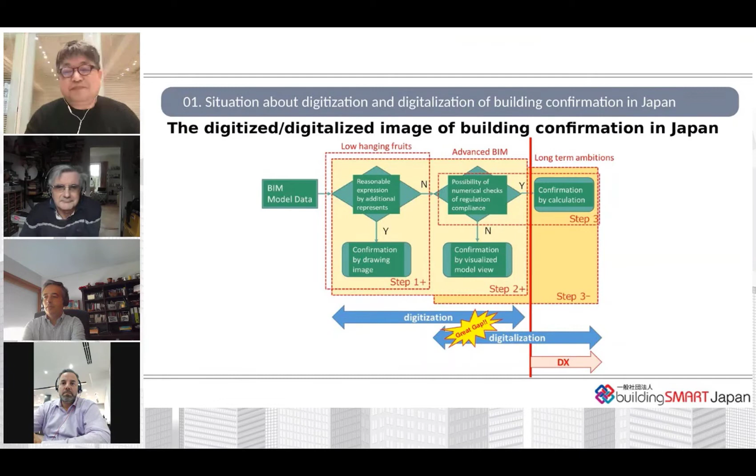The major issues are shown in this slide. The technical aspects are as follows. Can model viewing be a substitute for paper-based building confirmation processes? Especially, is it possible to express the designer's intention on building confirmation without excess or deficiency in the model view? Is it possible to archive the BIM confirmation data for the long term, as contrasted with paper document archives? For example, long-term authenticity and long-term readability.

The institutional aspects are as follows. Is it possible to prepare machine-readable legal documents? Who will bear the increased cost? How to ensure the BIM literacy required for building confirmation?

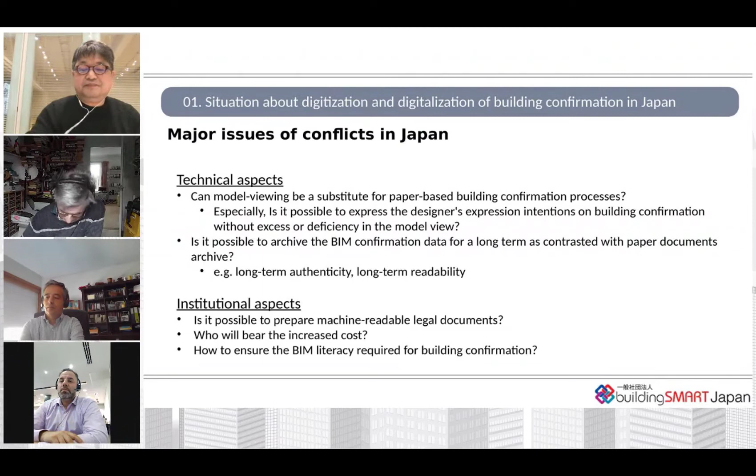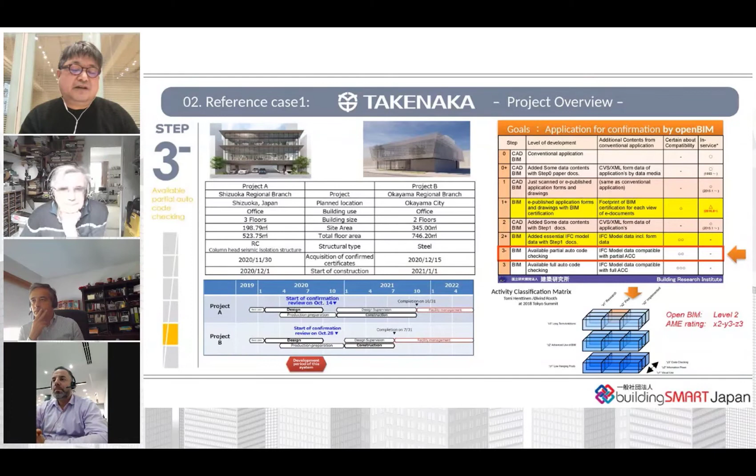Next, I'd like to introduce the reference cases. First of all, it's a case of Takenaka Corporation. Takenaka Corporation worked on IFC under the policy of open BIM. In both cases, the type of building is office, and the actual project was done between 2020 and 2021. The effort in this project is rated step 3- on the BRI development steps, or Muto scale. And the activity classification matrix, which is an indicator of BSI, evaluates the project as X2, Y3, Z3, and the open BIM level as level 2.

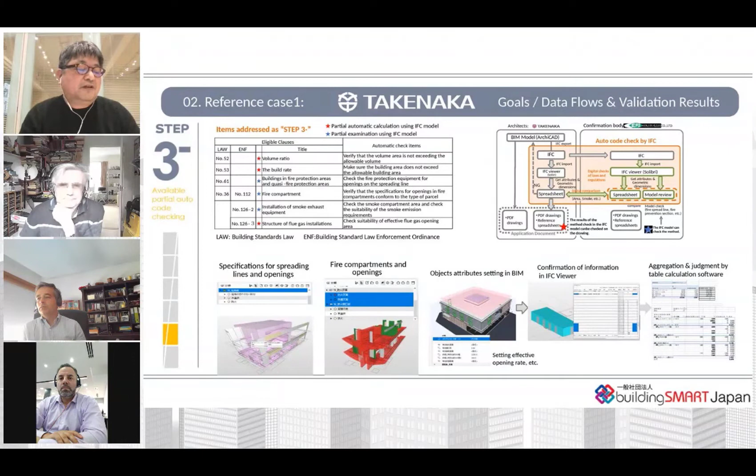These are results of this trial verification. In the upper left is a list of inspection items using IFC for the legal compliance check. The upper right shows the confirmation flow, and the lower figure is an image of open BIM confirmation. In this trial, the open BIM confirmation was conducted in addition to the conventional confirmation based on paper documents, so time-consuming work occurred. However, it became clear that if the open BIM confirmation could be fully conducted, the work could be reduced by approximately 30%.

Here is a summary of the Takenaka Corporation's trial. In order to develop this achievement in the future, it is necessary to understand step 3-, the merit of using IFC for building confirmation, and to treat IFC data itself as authentic data equivalent to conventional paper documents. On the other hand, it is necessary to build a consensus in the architectural community on whether IFC data can be used to meet the long-term preservation requirement of 15 years for application documents in Japan, and how to do that.

The next is the case of Shimizu Corporation. Shimizu Corporation's project was hospital construction, an actual project conducted between 2020 and 2021. Shimizu Corporation had considered the IFC approach in the past, but there were still many issues to be addressed at that time, so the decision was made to use the BIM authoring software environment for this trial with a view to using IFC. In this trial, the BIM authoring software and VPL were used to determine legal compliance, and BRI development step, or Muto scale, 3- was achieved. The project was rated X2, Y3 and Z3 on the activity classification matrix, an indicator of BSI, and level 1 on the open BIM level.

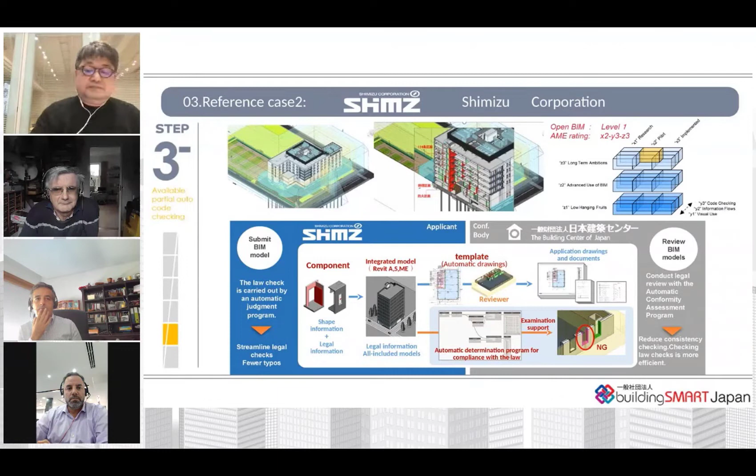This is a VPL process in BIM building confirmation. In this method, the attributes for the building confirmation are taken from the BIM model, imported into VPL to be checked by programming. The reason for using VPL here is the emphasis on visualization and

repeatability. The process of legal compliance cannot be trusted unless it is understood not only by designers who created it, but also by the reviewers who use it. It is also important to ensure that the same process used by the designers can be replicated by the reviewer.

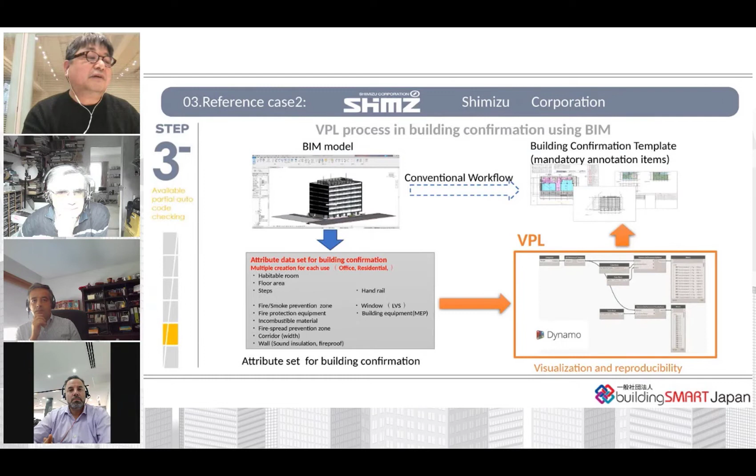For this reason, in this project, Shimizu Corporation extracted the items that could be compliant with the law using BIM and described the confirmation process in VPL, which was used as confirmation support. In this method, the components required for legal compliance and their decisions are extracted and combined, and VPL is used to determine the result as shown in the upper figure.

The lower three figures are examples of its utilization. Of particular interest is the consideration of the lightning rod on the far right. This is a visual representation of whether or not the building is within the protection zone of the lightning rod. This is a matter that would be difficult to represent and judge with ordinary 2D drawings, but by using BIM data, it is highly visible and easy to judge.

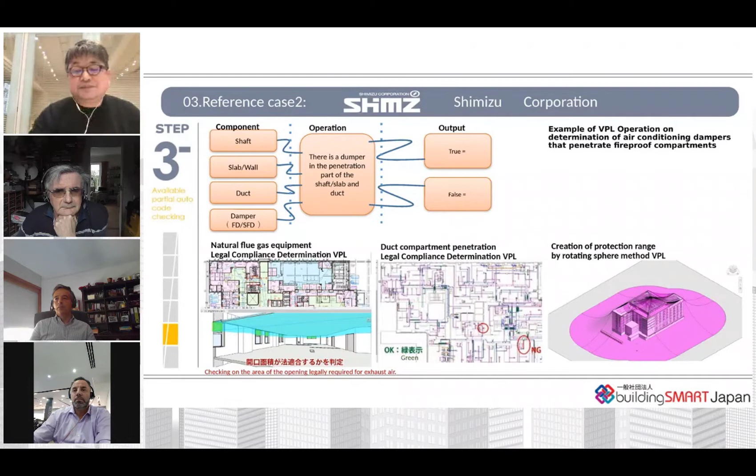Finally, I'd like to talk about the effort of the Digital Confirmation Application Working Group of BSJ. At the Autumn Virtual Summit in 2020, Mr. Kensuke Yasui, as a representative of our working group, announced that we are considering defining regulatory information that should be observed by regulations and exporting it in IFC.

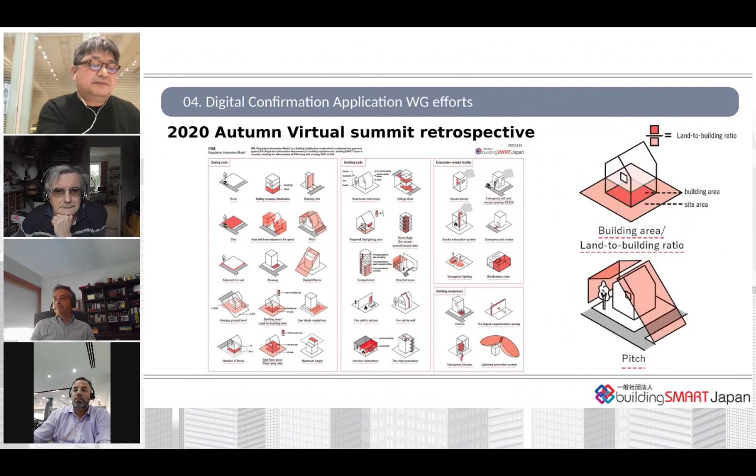This is an illustration of regulatory information that we would like to define in IFC that we introduced at that time. Discussion is ongoing, and here are some of the things we are discussing. We believe that defining RIM in IFC, which represents a model of the regulatory information of a planned building, will greatly contribute to the

internationalization of building projects. Therefore, in order to define the RIM, the working group for digital confirmation application defined two types of regulatory information. The first, regulation requirement model, RRM, which models the regulations themselves. And the second, regulation approval model, RAM, which models what has been planned and approved.

In Japan, the type and the size limit of buildings on site are regulated according to the use classification of the site. This size limit is based on the area of the site. Therefore, we are trying to extract the necessary information on area of site or floor area of building, etc., which is the basis on whether a building is buildable or not. The decision is largely based on the building to land ratio and the floor area ratio.

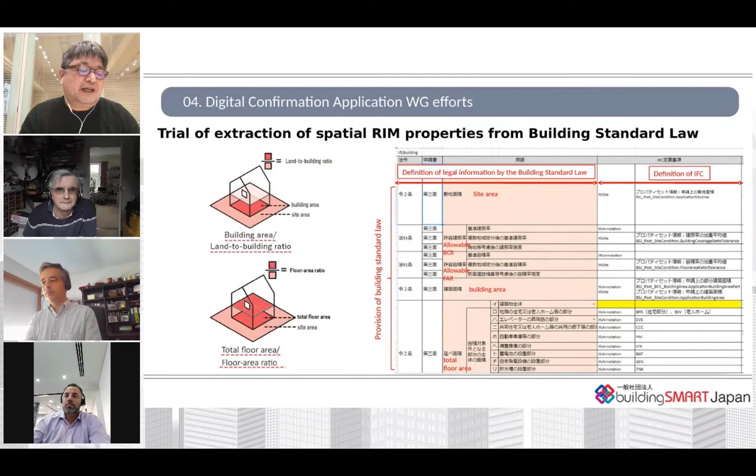But in the process of arriving at this decision, there are particular uses that are excluded from the total area. Our working group is currently investigating how to give the attributes necessary for this distinction. Our working group is examining the application for confirmation using IFC, referring to reference cases introduced earlier.

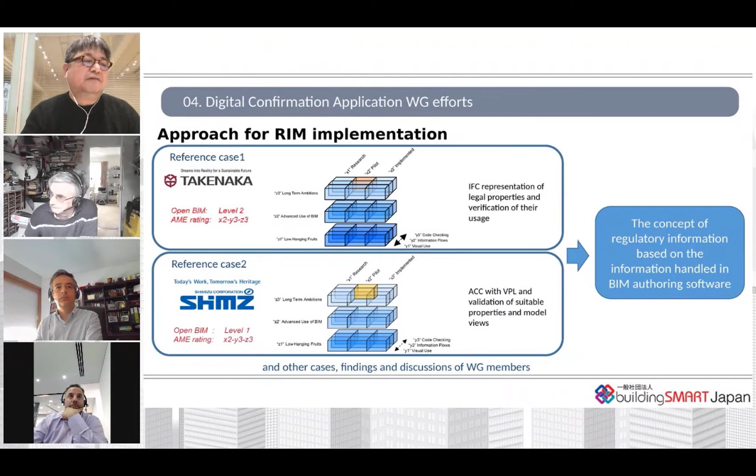This figure shows an image of an approach to implementing the regulatory information model. Our working group is trying to define the concept of regulatory information based on the information that can be handled in BIM authoring software, through the case of Takenaka Corporation, which is an example of legal property expression and their usage, the case of Shimizu Corporation, which is an example of a definition of properties and model views used for automatic code check using VPL, and other examples and working group members' findings and discussions.

From now, based on the cases and the studies I showed earlier, we are planning to create an IDM to express the necessary information organized by IFC for the area, and to define an MVD for building confirmation by IFC. In order to confirm whether the data can be extracted reliably based on the MVD, BSJ will conduct the IFC certification on RIM. After that, we believe that it will be possible to implement the systems. If this can be established for the area first, we plan to continue to add more items by developing MVDs.

So far, I presented that at the last summit. Then I'd like to talk about the progress of the study of spatial matters. As I mentioned at the beginning, the flow is digitalization and digital transformation in this presentation. The working group has been working on three phases along the flow of digitalization. Sorry. The definition is shown in the figure below.

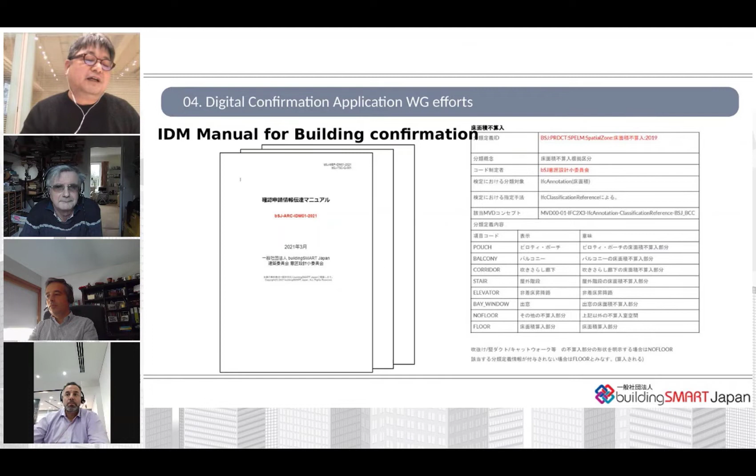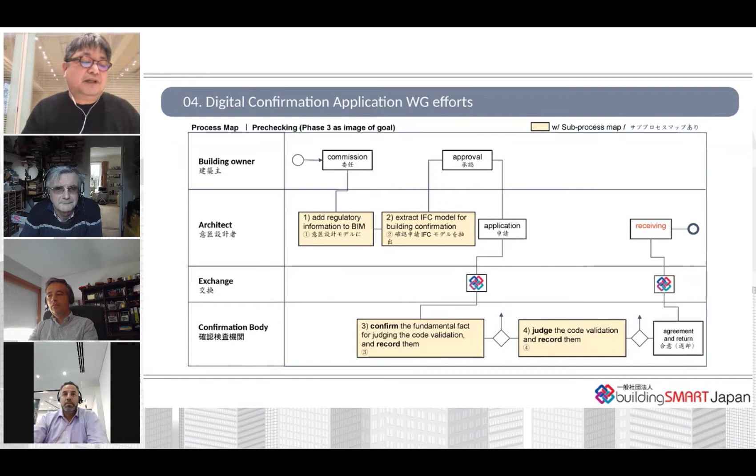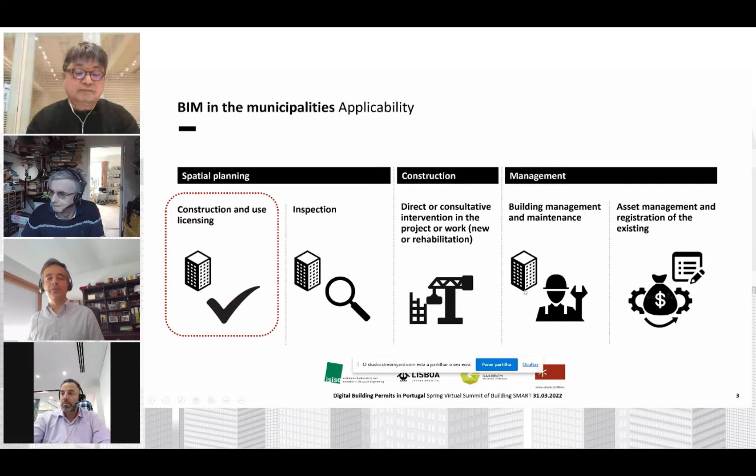So with this, the problem that has been identified is clear. We know that the inefficiency of the building permitting situation is a global problem. It's not only ours in Portugal, but we are definitely one of the countries with a lot of problems. The problem is time and money, basically. According to our Portuguese Investors Association, the investors for real estate, we have been in contact with them, they say that time is representing a very big damage to their capacity to promote investments. There's a very big degree of uncertainty, and so this damages investment.

It damages the economy, and then at the same time, it's not the municipalities that are the big bad wolf. The municipalities are actually struggling. They have too many things to analyze. They deal with the fact that they are public institutions. They cannot just open a box of money and make things happen immediately. So processes are slow. The number of people available is not many, and by not being many, they do the best they can, and still processes are delayed. So what we want, of course, is making the processes easier for these particular people, so they can actually contribute to a better streamlining.

And of course, there's also something extremely important, and in our contacts with municipalities this was clear: many times we are incorrectly charging taxes to the people that should be paying the taxes, because, for example, there was an area that was misdeclared. And so if this happens, then everyone is being damaged, provided that someone is not paying what they should be. So I think there's a very big problem that needs to be addressed.

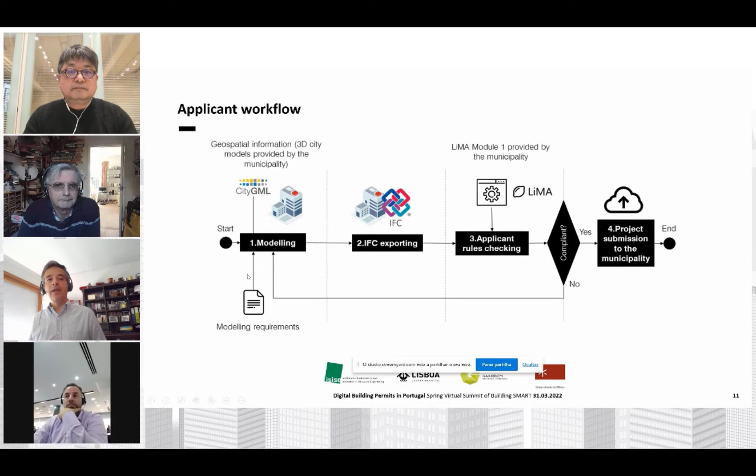So the workflow that we are considering is this one. From the point of view of the applicant, and next I will speak on the point of view of the municipality. So the applicant will receive the CityGML files from the town where he can integrate the BIM model in, and he will receive modeling requirements so that the BIM model is created according to some rules. Of course, by default, everything is made in IFC, so we are not using anything proprietary. It doesn't exist for us, literally.

And then there will be the rules checking that the applicant can do by uploading the project to the platform. So this is not a verification by the municipality, it's just using the platform to get an instant insight into the problems he may run into. And then if it's compliant, okay, it's ready to be submitted. If it's not compliant, then it just goes back and the person handling the modeling can just upgrade or change the project so that it becomes compliant.

Sometimes, if it's not compliant, not a problem, you may submit it anyway, but you will provide some evidence of the reason why you think, even though it's not compliant, the project should be approved. Maybe sometimes it's just a 0.1 millimeter difference, and you say, this is just a numerical thing, let's not delve into that.

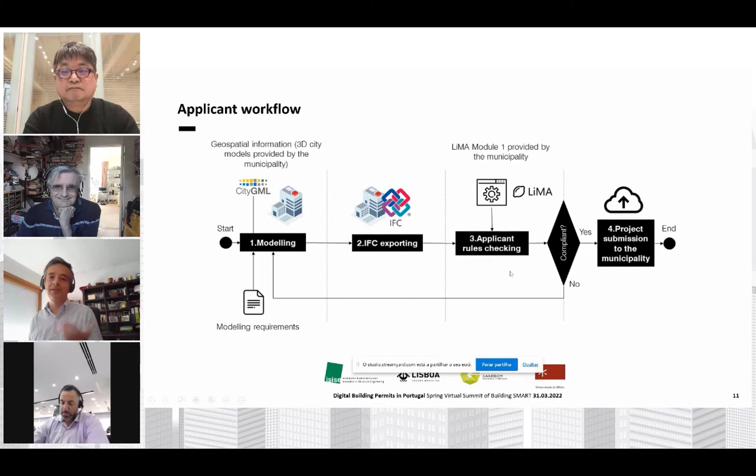Of course, in the workflow of the applicant, I didn't show this, but the applicant will receive later on BCF files, which we are still studying how to authenticate digitally so that they have the force of law, if you understand what I mean. They are legally binding. And so at the end, this would be a process that would be relatively simple from the practical point of view.

And we are dialoguing with our agencies for the platforms for documentation management to make this actually something that embeds into the current procedures of municipalities. So we are just adding an IFC to the process and the BCF. So this is a screenshot of what we are already doing. So we are programming this.

Of course, it's a web platform. In this case, we believe in the software being hosted in the municipality, and then it's coded in PHP and JavaScript together with HTML, of course, and then we are using some open platforms like the xeokit to do our graphical interface, but it's open, so nobody has to pay to use this if it's non-commercial.

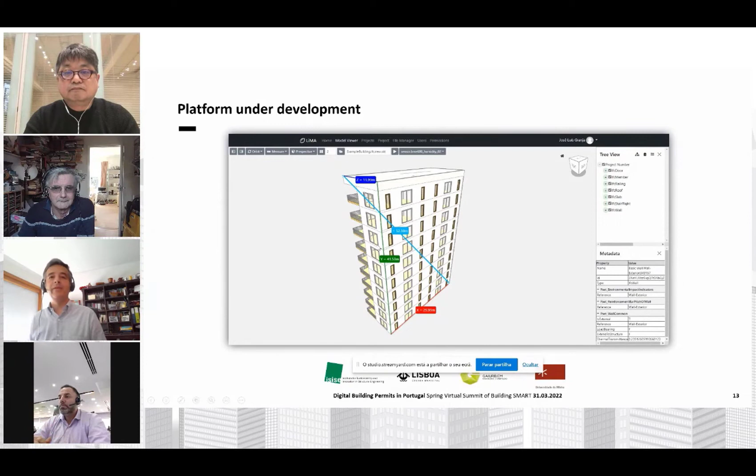And then in the end, this becomes available to whoever wants to test it in the future. We are opening this also outside. So the platform then relies on some Python code behind it to make the verifications using IFC OpenShell, by the way. So this is just one screenshot.

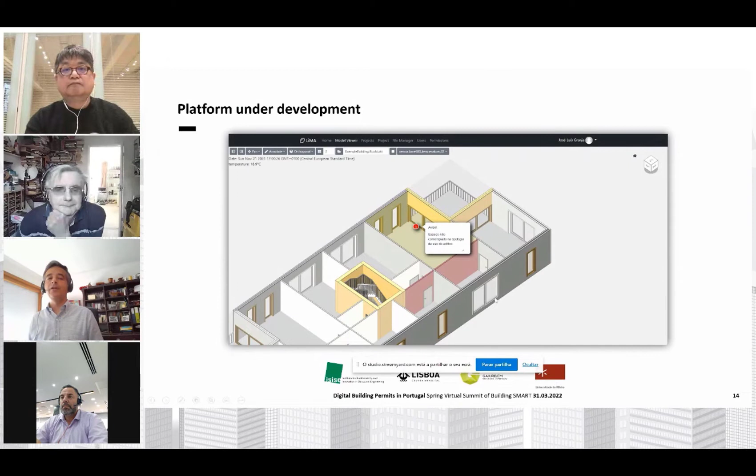And of course, the platform then makes variations according to the verification of what you are seeing and why, and then how you can act on that to create the BCFs. So of course, sometimes you will have plan views, other times you will have three-dimensional views. And one of the most recent things we did, even though it's not that appealing what I'm showing on screen,

is the preparation of some reports that are mandatory in Portugal, which is some table with areas and other aspects of the project, and some information that is necessary for our Institute of Statistics. And this is being done already automatically, even though we didn't do the interface yet, and we are working on the interface, so that apart from already doing some verifications, we are still starting.

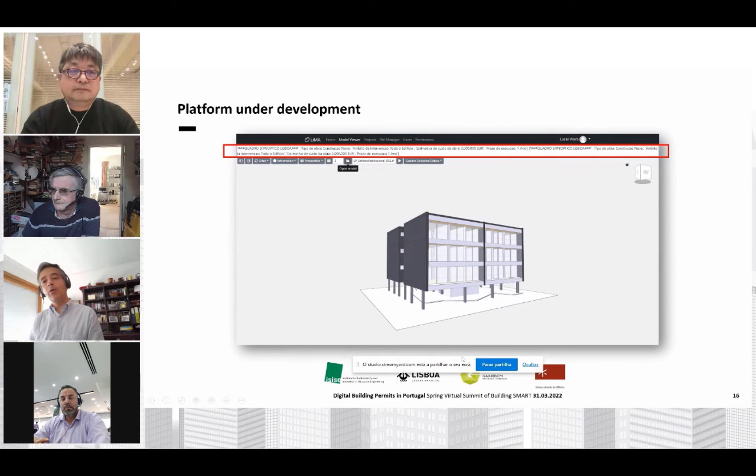We are already also doing the preparation of some formally necessary documentation that would be created from the BIM model. And of course, at the same time, we are working on interface ways for the municipalities to operate here. And the interesting thing, and I'm almost finishing, is the fact that by working together with the municipalities to develop this, we know that this is being validated by those who finally will use it.

So there are many advantages, and I think I mentioned most of them. So we are faster, you will manage your expectations better, taxes will be better collected, and also to motivate people, merit badges or things like that, to make sure that this will be advantages also. Not only do you get the advantage from using BIM, but also you will be recognized.

And the project that I mentioned, the CHEK project, is starting, and we will do also many things that are complementary to what I stated, and try to make an umbrella so that within the European Union, or even throughout the world, but first thinking about Europe, we can get something that will assist the frameworks throughout the entire continent. And that's it. Sorry, I was just rushing to keep my 15 minutes.

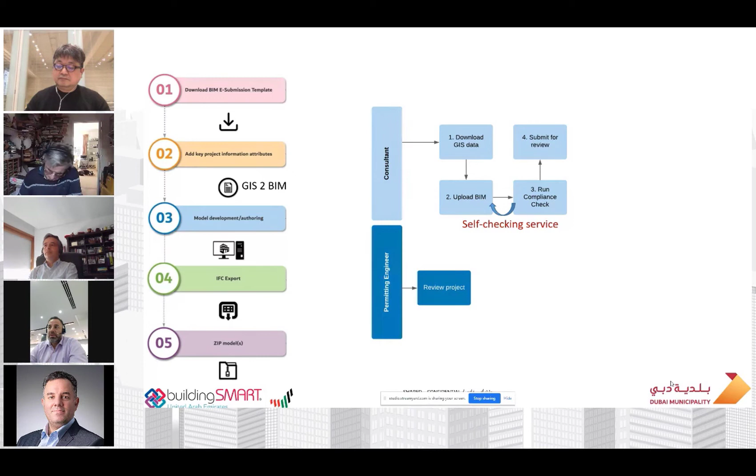And we provide for most software, like Revit or others, shared parameters, mapping files, options for the exporter to make this process straightforward. And also we guide him through the process of geolocating the model. To reduce the upload time, he should zip the files. He can include one or more discipline models in one zip file and upload it to the platform. So this is in general the process.

If we think about what the building permit engineer does from the point when the consultant released the model for review, as we said, he will review the model using the 3D viewer. He will run the compliance check if it was not done by the consultant himself. He generates the compliance report, notifies the consultant which rules should be fixed. He can give him some tolerance or allow some warnings or not very important rules to be ignored. And he asks the consultant for revision.

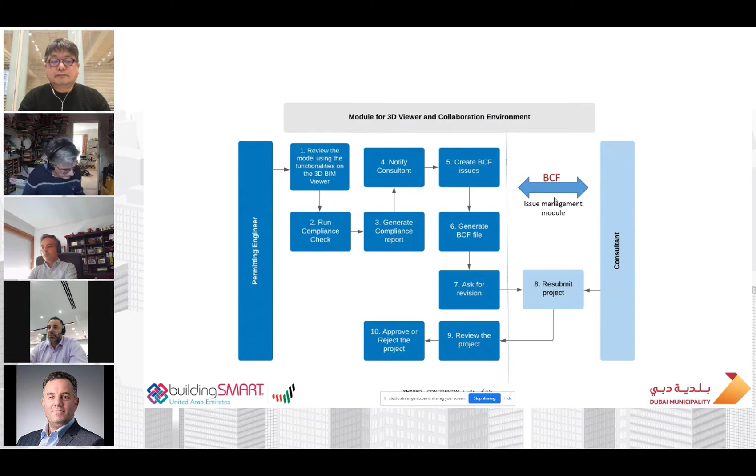The revision should be done by the consultant, and they can, during this time, also collaborate with this issue management module using BIM collaboration format until the model is correct, the information in the building card is complete, and the model is geolocated. The model is compatible with our BIM to GIS converter, so we can, after the permitting of that project, take it from the BIM world to the GIS world and convert it to the GIS compatible data structure. And at the end, the building permit engineer should approve or, for some reason, reject the project.

So this is in general the simplified process. I don't know how many minutes I have, just to figure out if I want to do a live demo, what I should focus on. Well, yes, please go ahead. So this is exciting.

So the platform is available online. If you go to bim.geodubai.ae, this is the URL of the platform. You will get access to many documents which will help you to understand how BIM is implemented, or our approach in Dubai. So just to show you, if you go to the platform, it's not necessary to log in, but if you go to the download, you will see that the BIM standard documents are available

for download. The Dubai building code, which is recently released, is now unifying and harmonizing all other previous codes and solving the problem of the jungle of codes which we had previously. So now in Dubai we have a unified, one single building code, like 800 pages with cross-referencing for hundreds of other standards. You know this problem for sure.

And we have other documents like the BIM roadmap, the BIM template for Revit and other software, and also a step-by-step BIM e-submission guideline document. Actually, testing, evaluating and accessing the platform is limited to registered consultants and contractors in Dubai. But at this phase, we are open for any collaboration with people who would like to give us feedback or to collaborate with us. So just contact me, and I will enable you to have access to the platform.

Of course, I will not have time to explain step by step, because then I have to log in and log out in different user roles to show the whole platform. But I will just try to show you how the platform looks and how it works. So now I'm logging in as a super admin, so I can actually do anything. But we will assume here that the consultant has already created a project, selected a multi-story project, and put the parcel ID for that project.

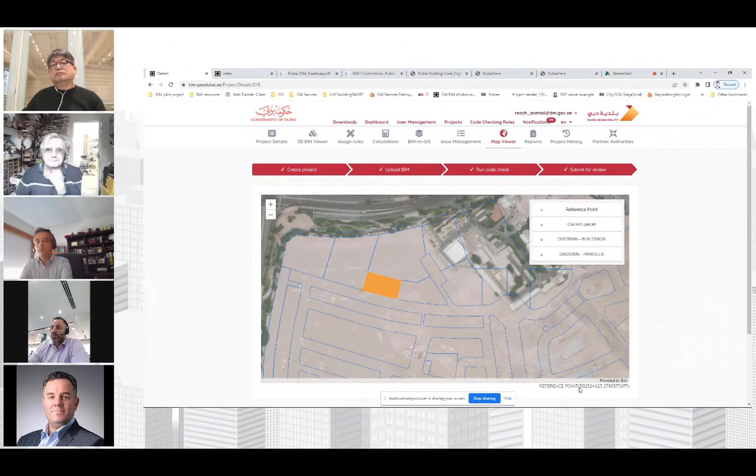So we can see out of the box now the location of the parcel ID. We can see surrounding buildings; maybe the layer color is not very good. And he can even use the reference point, this point here, for referencing the geo model if he doesn't want to use the GIS to BIM. If he decided from the beginning to download GIS to BIM, we provide him with a data set of information, and here I'm showing the zip file content.

It includes some IFC files showing the buildings, the border of the whole community, the parcels in that area, and some other GIS layers, electrical, water, etc. And we provide as well different layers in DXF format. And all this information, either the IFC model or DXF, is geo-referenced.

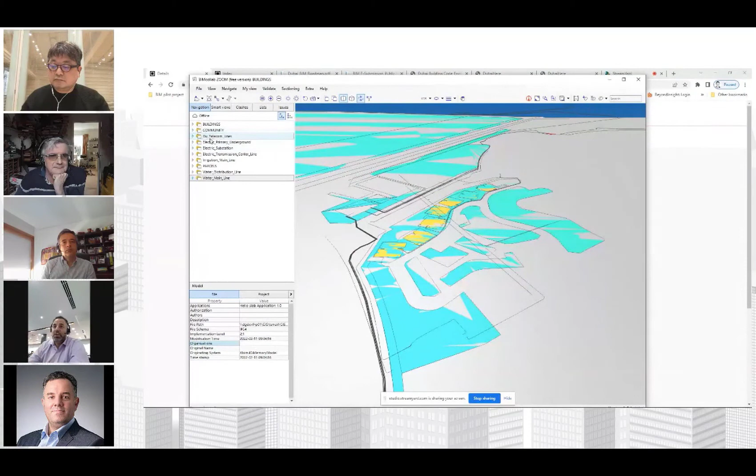So actually, if we open this model here in BIMcollab Zoom and add all these models, we can see here that we start. As I said, we need to improve this a little bit, to extrude the buildings with the real height, etc. But at least we have the GIS context information in a format which is known to engineers. It is IFC and DXF. It's not GIS at the moment.

So after that, we assume that he downloaded also the BIM template. As we said, we have BIM templates for 3 software at the moment. And if we take, for example, Revit, we will see that he has a guideline, the template itself, shared parameters, IFC parameter mapping, and the property sets, to be sure that the information included in the IFC file is the information we are asking for.

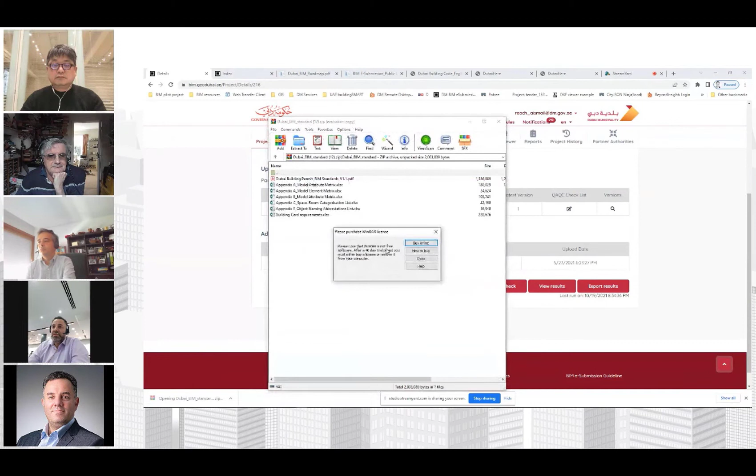If we look at the BIM standard itself, maybe there's no time to explain it in detail now, but at least I will show how the information requirement is defined at the moment. So we have the BIM standard, the document itself. It's not a very huge standard at the moment because we focus only on the building permit. We have naming conventions for everything. We have, as I said, the terminology alignment with ISO, and then we have LOD requirements.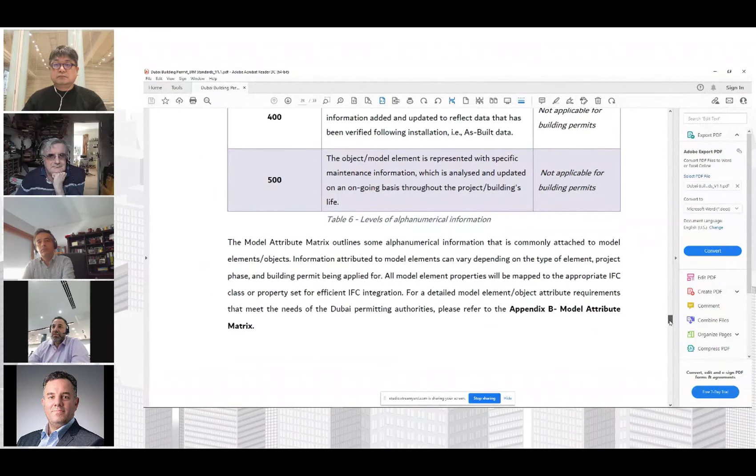And what is maybe most interesting for you to see is the classification system which we assume will be used. Now we are using Uniclass, and we started implementing OmniClass as well. So we would like different classification systems to be allowed inside one model.

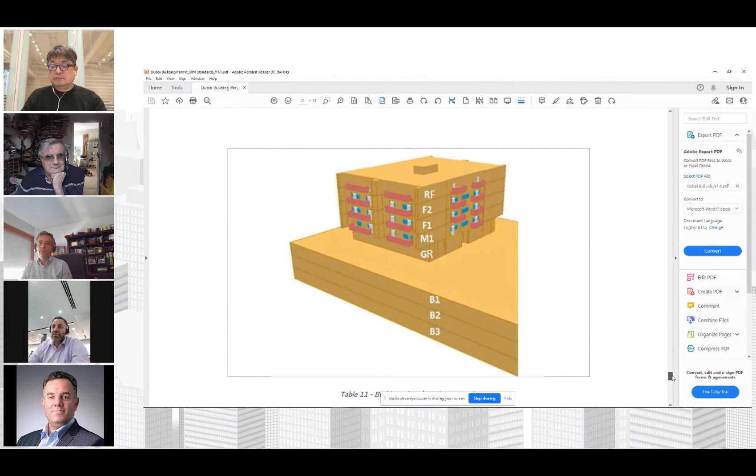And we have in the BIM standard some guidelines about the naming convention for buildings, for floors, even for elements inside the model. And if we look at our requirement of information, at the moment we are still using an Excel file. We plan maybe to put it online or on the cloud, or use a better system.

But as you can assume, for every kind or category of object, these are most of the objects which are supported at the moment, you will get a list of the attributes which should be included, the minimum information which should be assigned to different elements like beams, columns, coverings, ducting, doors, fans, etc. And for each of these rules, we are putting some further information, like where this information comes from. If this information is coming from the buildingSMART predefined standard, it will be recognized by Pset underscore and the standard name of that property set.

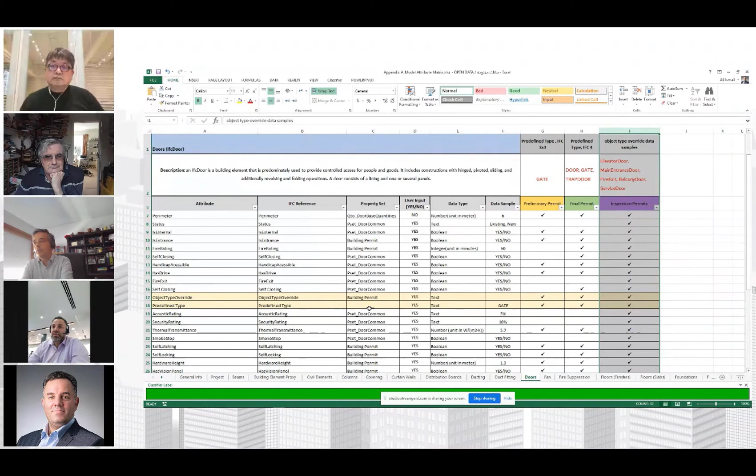In some cases, we are adding some additional attributes because they do not exist yet in the BIM standard, or maybe they deal with some locality or special cases here in the Emirates or in Dubai. And even more, we show where and why this attribute is important and where it should be used. This information is reflected back in the shared parameter files, or what is similar in other software. In this case, the consultant has a clear idea which information should be included and why. And furthermore, if we go back to the platform, because I assume you are maybe more interested to see the platform in action.

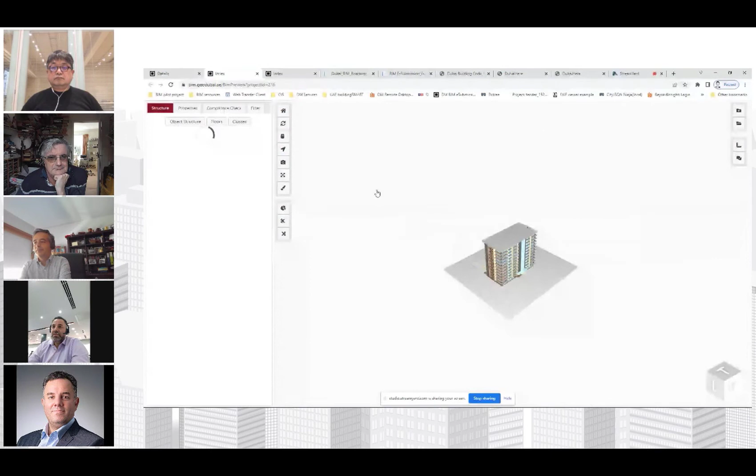So here he uploaded an architect model. Of course, he can upload other models. He can upload different versions. We can compare different versions, etc. We can merge all models together. So this is something I assume is not that complete. For this building, until it uploads here, I will show the aspects for that.

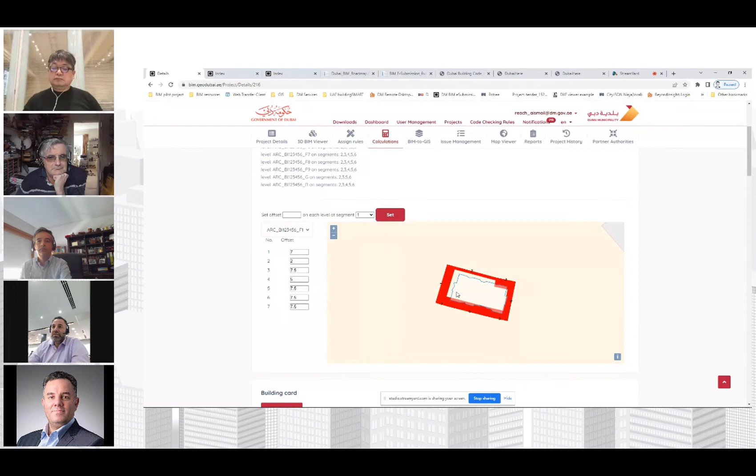We are not only focusing on the automated code checking. We are also focusing on the integration with GIS. So here we see, for example, it's now possible to do a visual check for the setback rules. All rules from the Dubai code, like according to some criteria, what should be the minimum setbacks from all areas, like if you have a road or building, or according to the neighborhood buildings. So a lot of rules can be visually checked here. And we see that all of this information is coming from the BIM model itself.

So here we can get a list of all floors, the total floor area, facilities, circulations, 1 bedroom, 2 bedroom, 3 bedroom. All this information previously had been provided manually by the consultant. It was a tedious and error-prone process. And there are also some very complex calculations here, which are maybe not that easy.

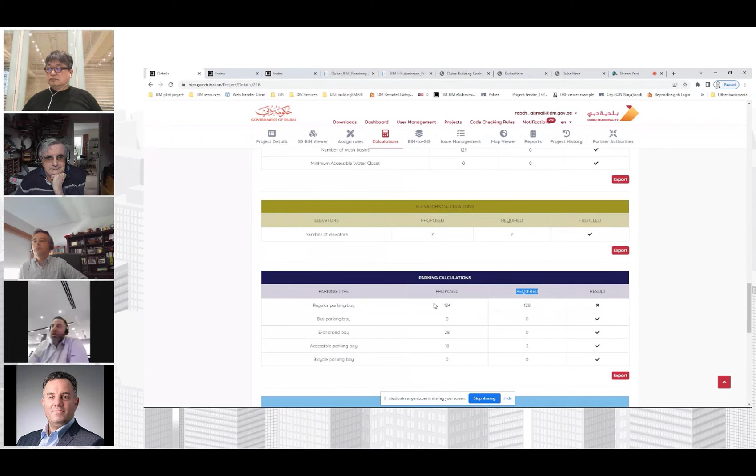But when we think about rules for parking, to decide how many parking places you need for a hotel or a mall or a school, whatever, there are some very complex rules for how you calculate them. So here we are doing some complex calculations in order to decide the number of proposed and the number of required parking, or waste like garbage bins, or other things. In the future, we will add more rules. We will add more calculations to improve the extraction of information from the BIM model.

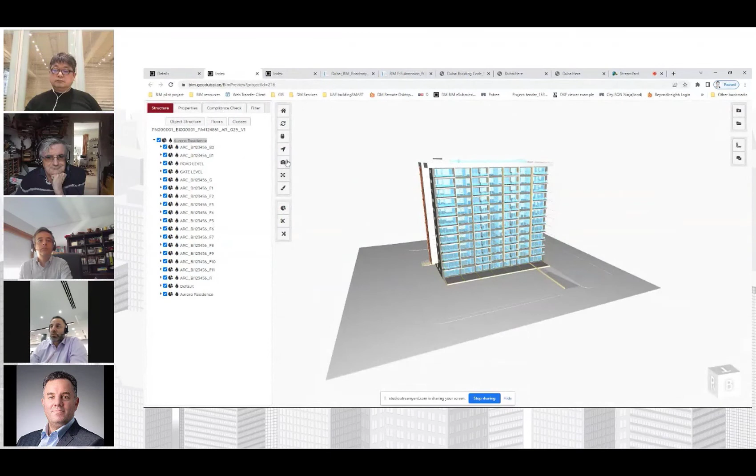So if we go back here to the online viewer, here we are also using open source, the xBIM online viewer, with, of course, some modifications and improvements. I will not go through how to use the viewer. It uses almost the same common features as all viewers. So I will focus mostly on checking the results.

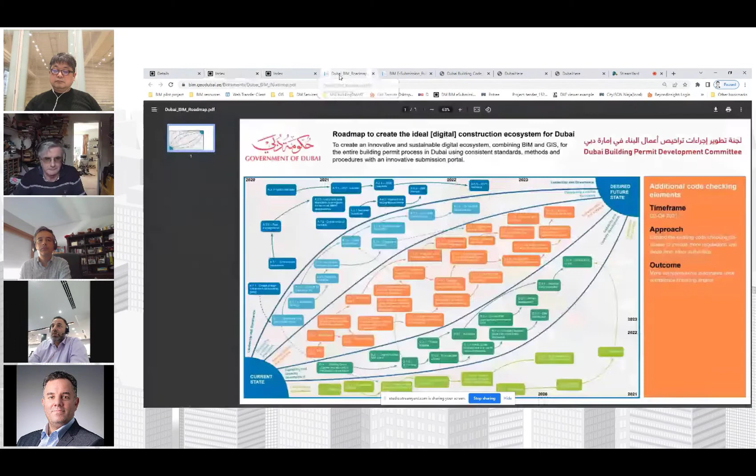So actually here I assigned a lot of rules to this model. The reviewer and the consultant can choose the category of rules he would like to check. As we see here, we have accessibility, architect, etc. And these categories are the same as in the Dubai building code, which you can even access online if you follow bimdubai.ae. So we can see here he can choose which rule he would like to check.

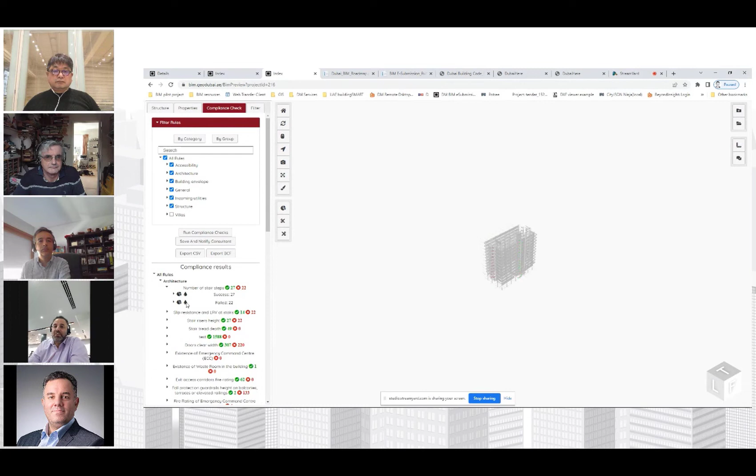So I just remove the villas here, and then he gets the result for every rule, which elements have passed, which elements failed, and he can even zoom in, and at the end he can export the results of these violations or problems in BIM Collaboration Format to import this information back to Revit or any other software and try to solve them.

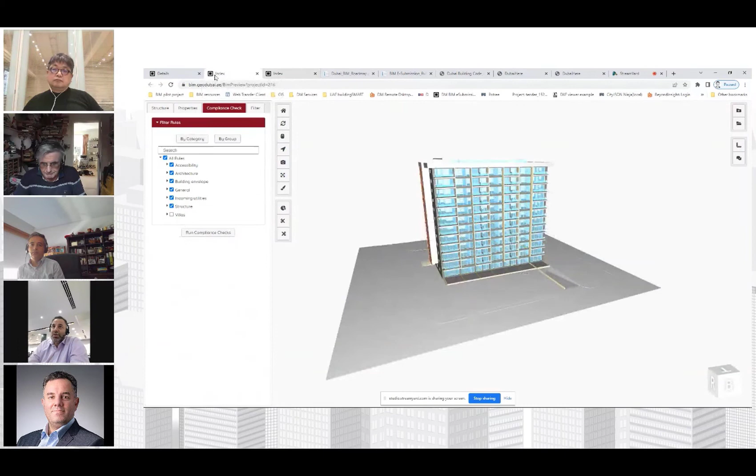If we would like to talk about the level of complexity in our rules at the moment, we are using a kind of GIS BIM integrated database approach, let's call it something like that. So when we look at the rules themselves, we will see that we usually have 4 types of rules.

The attribute rules, like semantic information, alphanumerical; ratio rules, if you want to compare 2 values with each other, like the window area in a kitchen with the kitchen area itself; geometry rules, if you would like to check some simple geometry relationships like intersection, included, within, distance, etc. And for IT people or advanced users, we have SQL rules.

So actually, these are the kinds of rules we are implementing at the moment, and they cover maybe 50-60% of most of the rules. We don't deal at the moment with rules which need a sense of engineering, or need a lot of topological analysis of the model, or linking BIM information with other information coming from other domains.

What is interesting here is that the platform should be easy to use by the building permit engineer, by the end users, and even the rules are done as an open box or white box. We are not using any commercial software or something closed. So this means even for the consultant and for the building permit engineer, it's possible at the moment to click on any rule and see how this rule is supposed to work.

So if I choose, I don't know, any rule related to doors, let me try something with doors. We will see here which page and which category this rule comes from, that we are looking for an object of IFC door as a class, which attribute, which values. So we have a kind of visual designer which allows non-technical users to understand and, after some training, to be able to correct, modify and add rules by themselves.

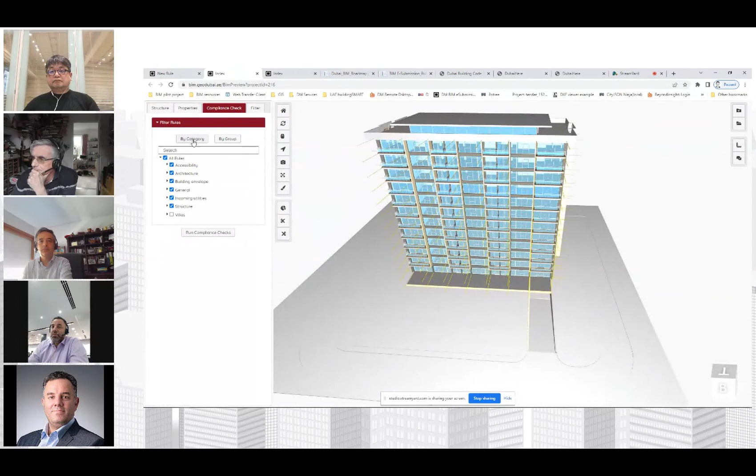Maybe just to show here the collaboration aspect: besides checking the result, sending the result and notifying the consultant, all of what I explained, we have some basic functions like making dimensions and creating issues. So if we look at our project here, this typical project, let me just try to open it. With this I will finish the live demo. Okay.

So we can see here, for example, for the issue management, that any party included in the project can create issues, reply, and close the issues. And after finalizing the building permit of the building, the super admin or the BIM supervisor can convert the permitted BIM model to a GIS database. I cannot show this very easily live.

That's why I'll switch back to the slides where I put some pictures, just to give you an idea how this works. So this is basically the result of converting a BIM model to GIS. This is ArcGIS from Esri, and this is the GIS feature layer. We are converting the basic elements in the IFC model to GIS feature layers.

And then we have developed a 3D building GIS data model where we can use this 2D information to create a simplified 3D building shape, and we then import all the models coming from different sources, CAD, BIM, laser scan, etc., all of them using the same GIS data model to build our Dubai digital twin. I think I have it open here.

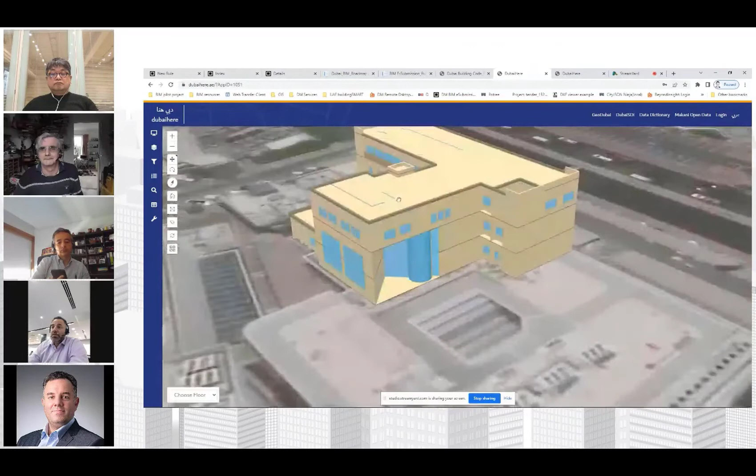So this is the GIS center where I work. And this information is coming from, I'm not sure if BIM or CAD, but they are using the same GIS data model. And even if you would like to see where I work, I'll try quickly. So this is the place where I work.

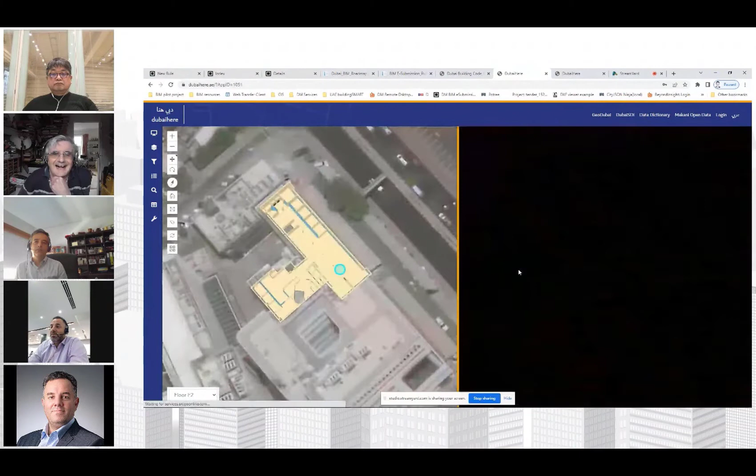Unfortunately, we have open spaces here, so that's why sometimes it's very noisy. I think I work here. So this is my table.

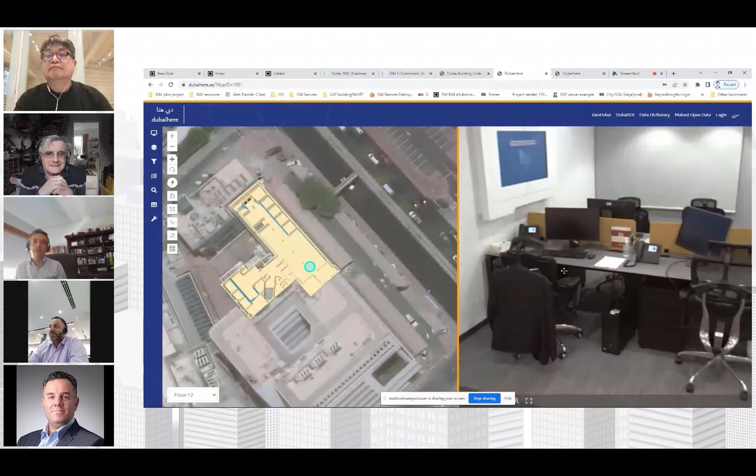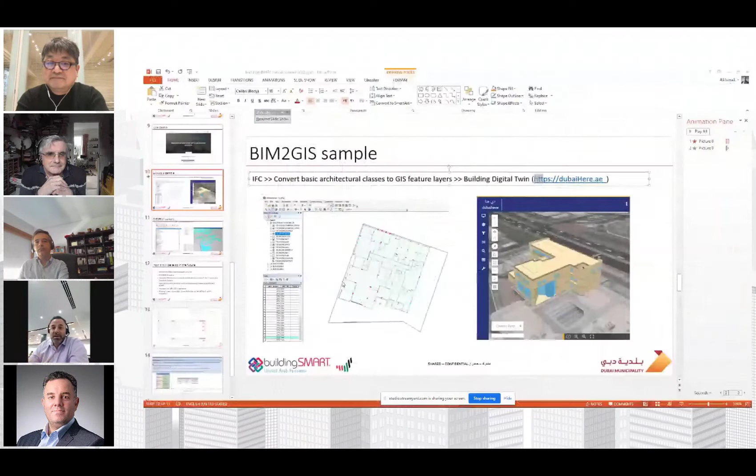So we are trying now, as I said, to move toward a digital twin, applying all of these things in the Dubai platform for the digital twin. The last thing I would like to show, actually, I think I showed this quickly. And this was, for example, again an example of how the rules work.

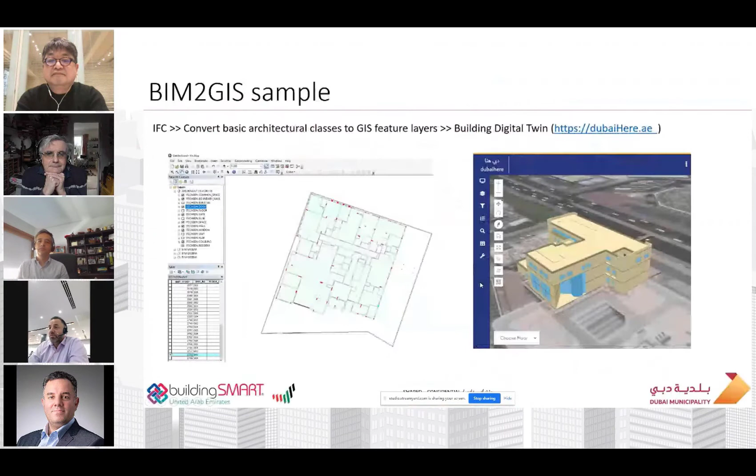Sorry. So I think it was here. So I think I explained it, but as we see here, it's very easy to know how this platform works or how the checking engine works.

If now we think about how it will develop in the future, to conclude the presentation, of course, we are now working to extend the BIM standard to add more use cases and to be extended not only on the building permit phase, but for other project life cycle phases. We are extending the rules to include all other NOCs like electric, water, civil defense. So we are communicating and working with them.

We are working on pilot projects planned and executed by Dubai Municipality and other government or private sector to evaluate the platform, test it, and promote BIM further. In the next phase, we will work on enhancing the implementation of the checking engine by applying advanced checking methods like geometry-based, graph data-based, artificial intelligence or machine learning, which can also help by checking advanced rules like voxeling the model or using topology analysis, etc.

And we would like to work to improve the BIM to GIS integration. As I showed you, we're still doing our first step by BIM to GIS. And we are moving also toward Open BIM, Open GIS integration. So we would like to have an IFC to CityGML converter beside the IFC to Esri or to closed GIS. So I hope that I didn't take too much time, that we still have some time for questions.

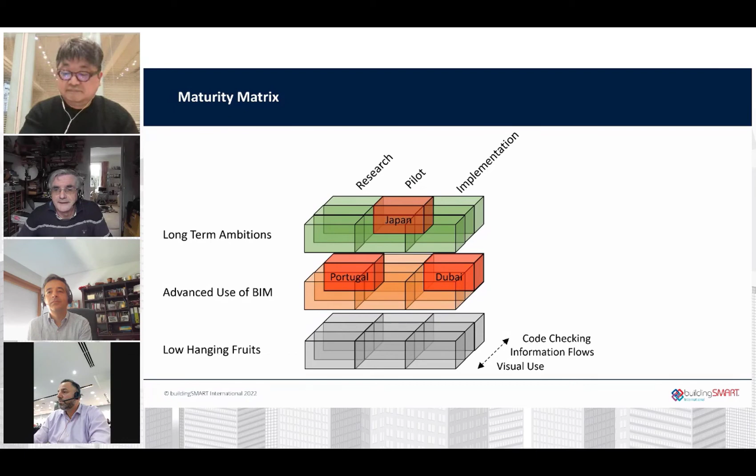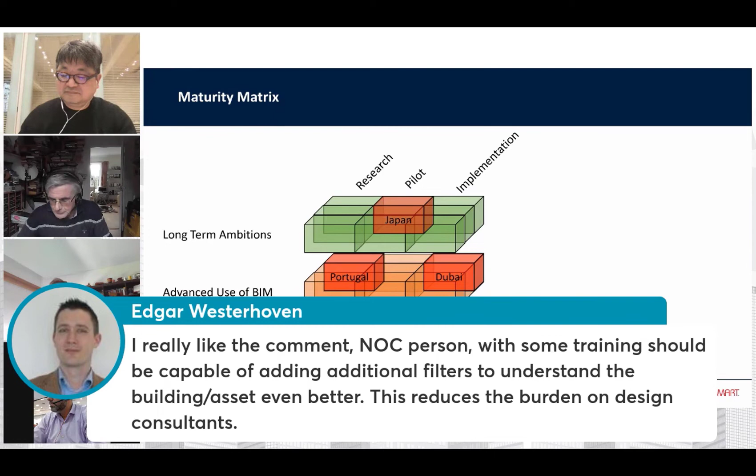What I'd like to do now is, first of all, thank the presenters, and then turn to the questions and comments, and just share them with you. Edgar Westerhoven has remarked that officers need to be able to interact with the BIM model to choose their filters, to understand what they're looking at, rather than the design consultants having to present every version of the information that they might want. And I think that's important.

There are free BIM viewers which will do that, IFC viewers, and then you can have specific viewers that are driven by regulatory concerns. And I thought it was very interesting that Dubai was generating a lot of the technical reports or tables to back up the decision-making evidence. So that was nice.

Stefan thinks he saw a discrepancy between the 3D model and the GIS tiles below. I'm sure that we will make due allowance for the fact that it was a demonstration, and hopefully we can get the accuracy we need. Ali, are there any issues with accuracy between BIM and GIS?

Actually, maybe the building I showed in the live demo is different from the GIS model, or the GIS center is not the same as what I showed. But yes, we still have some problems, because at some point we want to automatically, for example, generate the building footprint. In this case, we are taking a lot of elements in the IFC model, and applying some 2D geometric and mathematical algorithms to automatically join and merge all these elements.